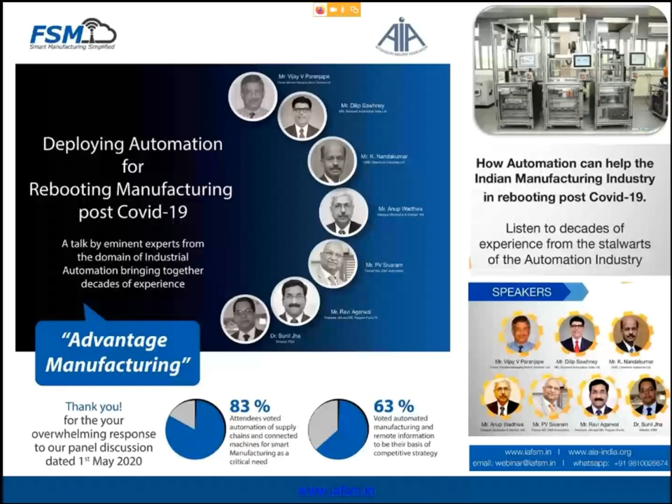I will now move you through the introductions to our panelists. Can we have the profiles of the panelists? Our first panelist is Mr. Dilip Sawhney. Mr. Sawhney has more than 27 years in industrial automation and in the healthcare technology industry. He's served many leading corporates, both in India and in America. He has been a member of the National Council of CII. Since 2008, he's served Rockwell Automation, and he's responsible for leading India's business in automation.

Mr. Sawhney graduated with honors in electrical engineering from IIT Roorkee. Prior to Rockwell, he has worked with Larsen and Toubro, GE Fanuc, and here he is in front of us, going to lead today's discussion. Welcome, Mr. Sawhney. Thank you so much, Anup.

Our next speaker is Mr. Sivaram. Mr. Sivaram graduated in electronics engineering from IIT Madras, and he has devoted his entire career in the field of industrial automation, starting with BARC, where he worked in automation of power transmission and distribution communication. He has an overall very wide experience in DCS, SCADA, microcontroller applications. In 1996, he founded B&R Industrial Automation and was their managing director till 2017.

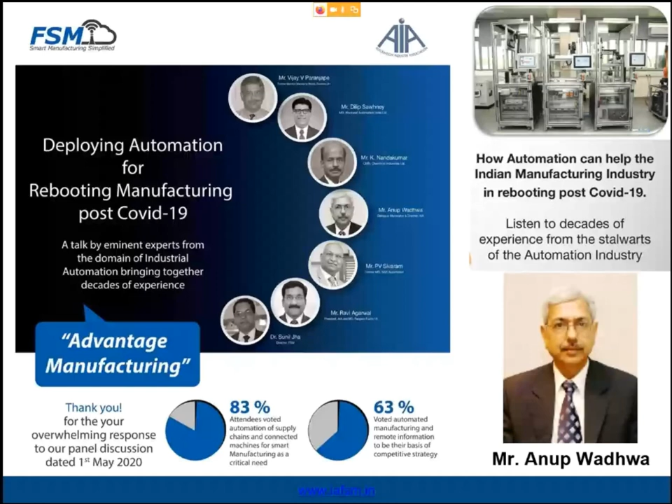So looking at the backdrop of today's context, one of the things clearly people are looking at, and it was even there in the first session, is remote monitoring. I'm going to request Mr. Dilip Sawhney to share with us what are the strategic choices in front of us, and with remote operation, is there a chance for safety to be compromised? Can we address and identify the weak spots, and also what is going to be the situation if decision makers are not actually present at site?

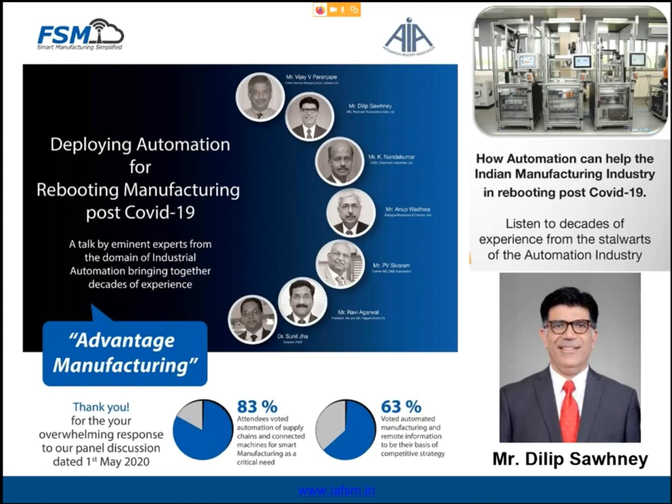Anup, I will address your question. I'm going to be using a couple of charts, so it'll be nice if you can bring them up on the screen as I begin talking. So, as we had deliberated in our last session, technology and automation is going to have to play a front and central role in the way forward from here, right? And yes, you're absolutely right. Remote monitoring is a very, very important consideration, right?

If I may, I would like to start from the context of a typical brownfield facility. Why brownfield? Because we are thinking of starting off with what we have. Greenfield is something which we'll get to eventually as life normalizes, right? So in a typical brownfield facility, the challenges that you would typically expect, especially in the context of a cold startup, right?

You're going to have limited workforce, and like you yourself said, physical distancing norms, and also the fact that many of the migrant workers may have moved back, and these are people who had a lot of tribal knowledge available on how certain operations needed to be carried out. You have lesser hands. B, you'll have those trained people no longer available on site, right?

So essentially, you're looking at a set of challenges, and pay some attention to this graphic which is there in front of you, typical facility. So there are considerations like safety, productivity, skill gaps, ensuring collaboration while people are remote and apart, right? Now, some of these challenges may certainly require some new investments, right? One of the examples could be if you did not have a holistic safety strategy implemented.

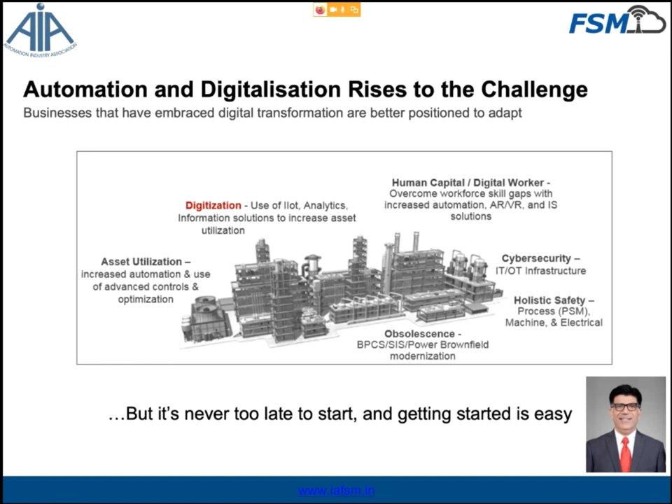And if you can take me to the next chart, please. Right. So what I'm trying to say over here is not everything needs to be a fresh investment. And I'm taking the example of implementing alarms. Most of the plants, most of the facilities, factories, they already have the facility of alarms. But oftentimes what we've seen is that these are either overlooked or they're bypassed or simply not in use, right? Now, nothing can be worse than restarting and then running into an unplanned downtime, which could have been easily avoided if the alarms were not suppressed, right?

So what I'll submit to you all, before I come to the topic of remote monitoring, is a back to the basics approach, leveraging the investments that you already have made, right? Because there's a whole lot that is already there in terms of the capability of the existing systems, right? Please pay attention to those capabilities, which sometimes in good, quote unquote, normal times used to get overlooked. They need not be overlooked now. They are going to be your best friends, shall we put it that way, right? As you go ahead and restart with severe constraints. So take me to the next page if you can, please.

So as we transition, Anup, I'm going to now come to the point that you had asked me to talk about, right? Remote connectivity has become a very important consideration. There's no doubt about it. In our previous webinar, we discussed at length about the role that technology in general has to play. And I think there was, by and large, very strong endorsement from the audience as well, right?

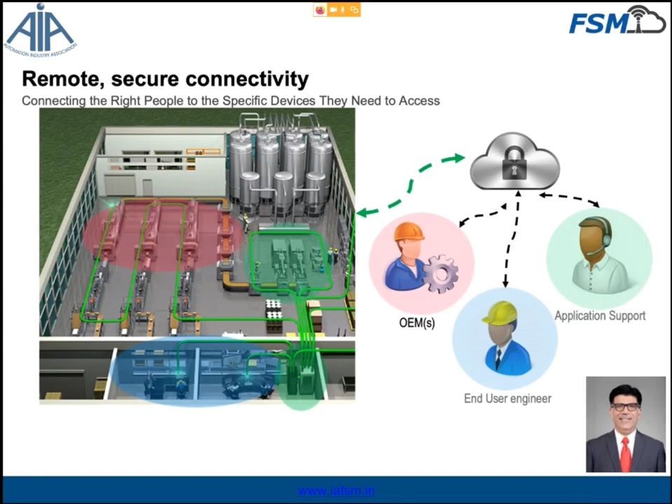If you can move to the last chart, which is also my final one, I wanted to share with you this paradigm. Call it an eventual vision. I'm calling it the connected worker. This concept is basically an extension of the industrial digital transformation that we talk about. It comes to the foreground in times like this. You'll have fewer and fewer domain experts who are going to be on site.

So you'll eventually have remote operation centers that will be created, or pools of remote experts who are physically dispersed. But they will need to be accessed, often in real time, by people who are on site. So mobile and augmented reality technologies are already being used. This is no longer futuristic. This is happening right now.

And if anyone is interested, I'll be happy to share some use cases and also some success stories in this phase of lockdown, where people right here in India have been able to use these technologies. I was on a call with a customer just this morning, and I was delighted to note some examples coming from their side.

What needs to be borne in mind, though, is that when you think of a digitally augmented, multi-skilled worker, why do we say multi-skilled? Because there's a pool of domain experts who are enabling a worker who's in situ with the equipment. This is not a slam dunk technology implementation. It's not. In order to drive sustainable results, you need to do this in tandem with people and processes.

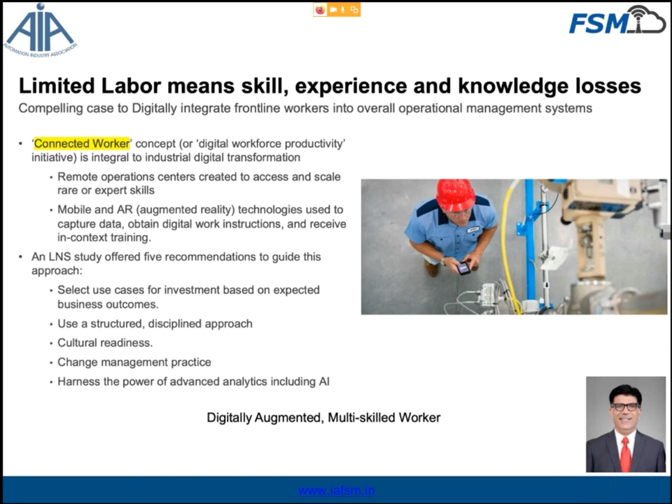We have to commence production in a safe manner, and the challenge will be to keep production going with reduced manpower. Now, we've heard about the concept of connected machines since a long time. Does connected machines address this need during the reboot and in the new normal situation? Mr. Sivaram, what is your take on this?

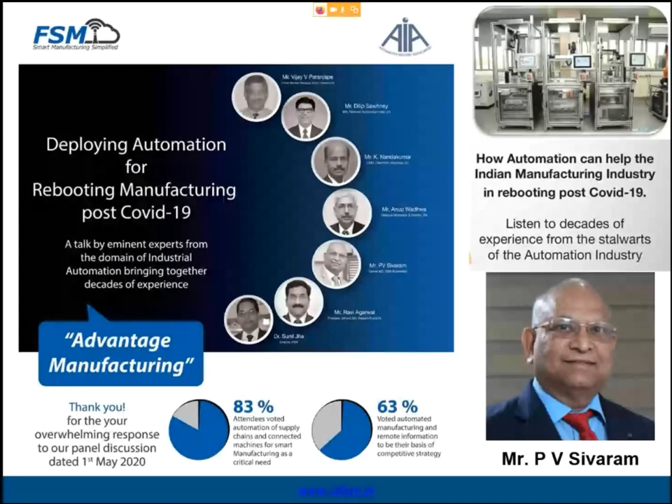So, we've spoken about remote connectivity as a technology piece. We've spoken about connected machines. And now let's move over to the other most important asset in a manufacturing operation, which is the materials. So taking back control of the supply chain, which is inbound, outbound, and in plant, is going to be of very high consequence. I would now invite Mr. Agarwal. Mr. Agarwal, how can intervention through automation help an organization to create advantage in manufacturing?

I would like to invoke maybe a picture along that. Could we have the first part? Thank you. I would say, given our material chain, given the information, it is the efficiency of how we deal with the material. Any kind of intervention through automation and information transparency increases the efficiency of the operation. And that's a very, very desirable aspect in the material chain. And the more information we have of what is happening, incoming, outgoing, and on the shop floor, good transparent information will help us to reduce waste. And it becomes more and more critical.

In fact, mitigation of waste is actually a direct saving. I'm going to talk more about it down the line.

And as the information along the whole chain of the enterprise, we started that in the beginning from my colleagues, information of the enterprise, information about the connection of the machines, the health of the machines, the operations of the machines. And if we couple it with the information of the material in the enterprise, that paves the way for a lot of success and efficiency.

And in hard times, as we are at the moment, all of this, efficiency or waste management or information transparency and exchange, culminates into the most coveted aspect of the enterprise and the individual, that is the cost. So I've tried to indicate how through material chain automation, one can engage in increased efficiency, reduction of waste, increase of information, and reduction of the cost.

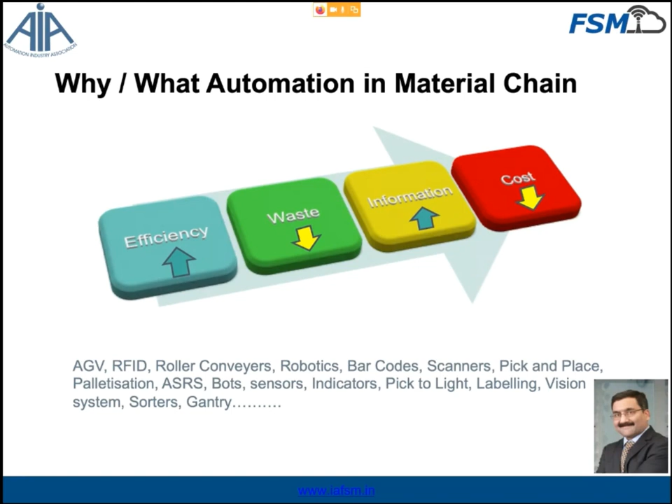Of course, the safest and the simplest bet remains barcodes, with which people identify the material through the different stages. And all of this, if implemented in the most ergonomic and viable way into an operation, increases the distances between the operators and decreases the surface handling of the manufactured or packaged material, and so on. I can go on and on, but there are quite a few solutions currently in the bouquet of automation which actually help in outbound and in-plant material handling. Quite a few: labeling, vision, and so on.

But what am I actually saying? If I can distill it down to certain turnarounds, most of the time in enterprises, we are struggling with reprioritization, identification, what came from where, something lying around. So I would say preferential vendor items, reducing human error, because once the material is typified through whatever solutions, distance reading, optical reading, they are reducing human intervention and therefore the human error as such.

The vendor management, the timing, the incorrect billing. See, increased amounts of data and goods waiting to be processed are also accumulating due to human error, incorrect allocation. So with partial and semi-automation, not big ticket automation, these very key areas can be addressed, especially in volatile times like this, where the probability of error actually rises multifold.

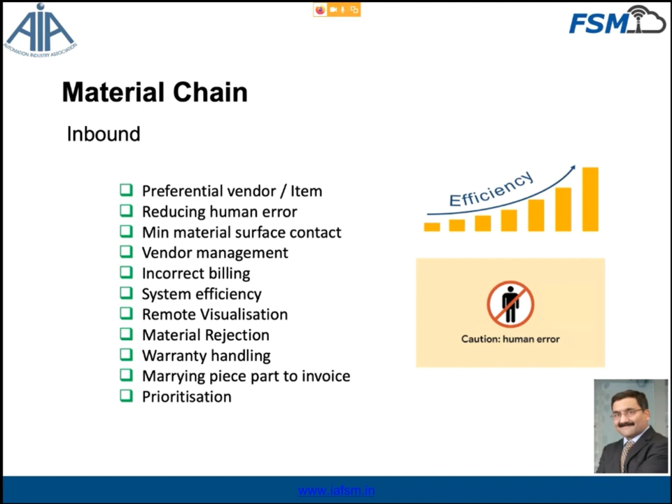Could I have the next visual, please? Thank you. So as the material has come into the factory, one of the bigger banes is, what is my inventory? Can I have first in, first out? Because most people talk about it in actual manufacturing. You and I know how first in, first out is so very difficult to implement in a manual fashion.

One of the key aspects in this material chain, if the material so produced is identified and it's in a connected enterprise, remote visualization included, is the genealogy. So if the piece part being produced can be characterized and its information stored, that goes a long way within the plant: reskilling, improvement or removal of defects, and also goods assurance to the outbound. Similarly, work in process management and prioritization.

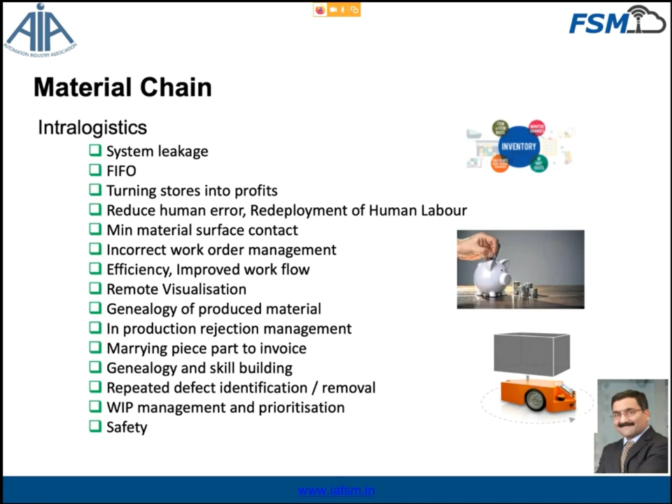The system leakage. The bane in manufacturing has been, well, what is the wastage and the system leakage, whatever the reasons might be, moral, immoral, or whatever. But information-driven manufacturing or an information-driven material chain actually helps us arrest system leakage. And arresting system leakage adds directly to reduction of cost. And there are many proven cases, lighthouse projects, where all this has been done. Warranty handling or inventory management.

Another part in the outbound supply chain or material chain is dealer stock visibility in an enterprise. A lot of time and resources are always spent in haggling as to what is needed, what is the stock, what is the work in progress. So visualization of information with partial or full automation helps us in a very quick recovery in the post-COVID scenario. It may not be big ticket; the prescription remains within our own processes: whichever are the pain areas, we start with them and then integrate horizontally and vertically.

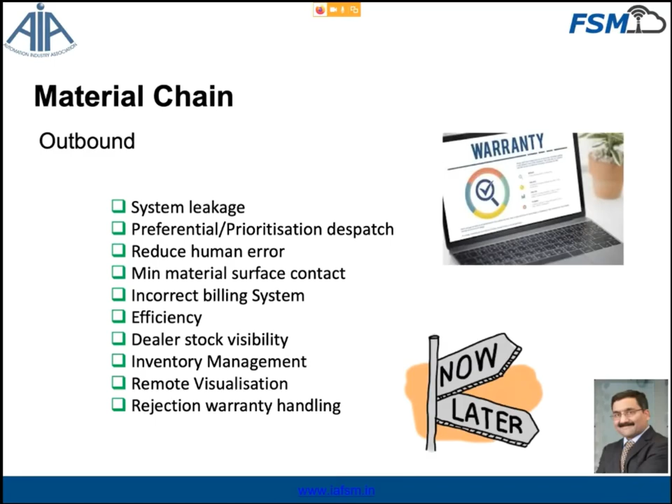Thank you, Mr. Agarwal. I think you've clearly laid out the roadmap for foolproofing in areas of identification, tracking, tracing, etc. I think there is a need to now look at another aspect of business, which is, traditionally manufacturers and manufacturing oriented companies have always been comfortable with a steady flow mentality, which means once a line is on, it'll keep on producing the same stuff and try and get economies of scale.

Now, many believe that in the new normal, the business will be challenged on this mentality. There would be frequent adjustment in the production plans. The machine setups may need to be changed, and at the same time, without having any drop in quality.

So I would like to now call upon Mr. Paranjape. Mr. Paranjape, in the light of all this challenge happening, how should manufacturers cope with this? And is there any role for automation?

From the mall, the orders are going into SAP as a sales order. SAP is doing the MRP run. This is connected to the product lifecycle management system deployed there, which is then triggering the whole manufacturing process. And I have seen with my own eyes a product which is normally manufactured in millions per year, a batch size of 10 with 3 variants moving on the line. So it's not something theoretical. This has been achieved. But if this is going to be the requirement from the market, then we need to have an integrated approach to our manufacturing automation. Next slide, if I can have.

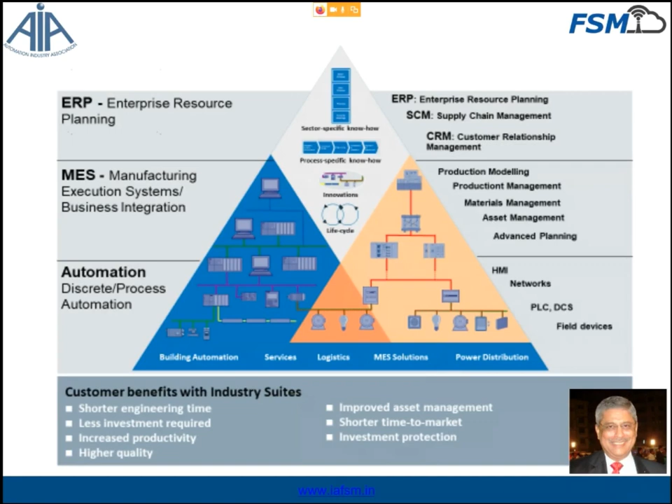This tells more in, what should I say, boxes. What we need to have. We need to have the field level, the control level, the operational level, the management level, with both management of the business and management of the product processes and resources. It is only when you have this kind of an integrated approach that you will be in a position to meet this requirement if this has been identified as the pressure point from the market, if this is being considered as the new normal for the manufacturing industry.

Similar examples also exist in pharma, where again the batch sizes are becoming smaller. But the more concrete example which comes to my mind is automotive, because it has been there for a long time. The other point is, how do we be in a position to do quick startups? If I have heard it correctly, it was in the first presentation that we may have, I hope not, similar instances even in the future. If that be the case, then we need to have the possibility of simulation and a digital twin.

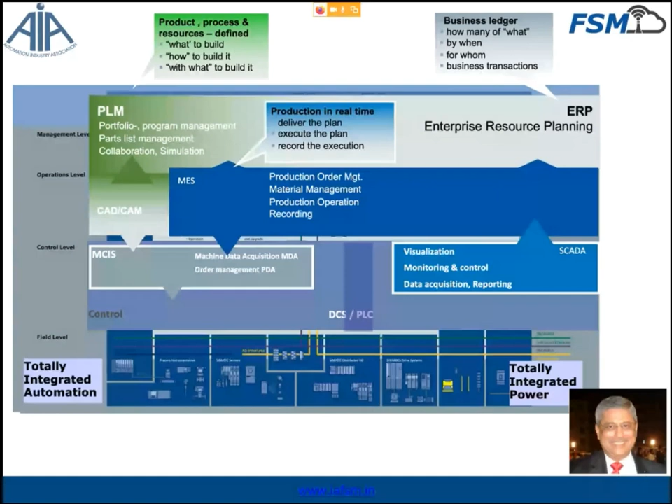Well, this is what the industry is working towards, where you see the autonomic components, the self-configuration as far as commissioning is concerned, self-optimization, and the holistic modeling. All that for consumer satisfaction. Now, this is not the forum to go into the details, but this is what is going to be available if consumers are the ones driving us to this new normal of, let me say, a single piece flow. Then this is what is going to be the requirement for the near future.

With that, I conclude my presentation. And in any case, during the question answer session, if there are any questions on this, I will be very happy to answer them. Over to you, Anup.

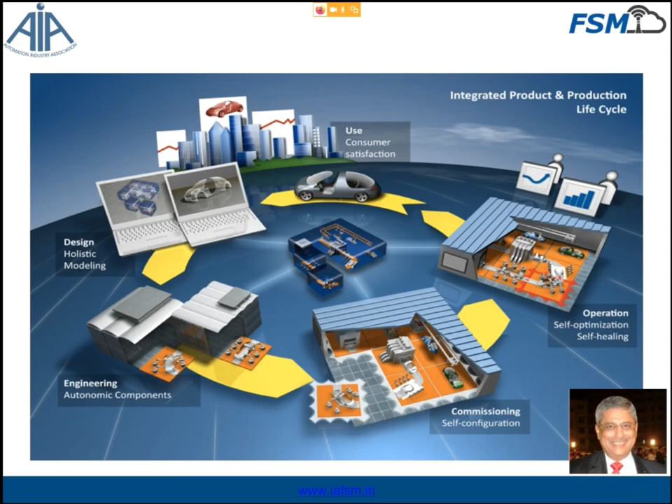Thank you, Mr. Paranjape, for the wonderful insights and also the cautionary advice you have given. We are therefore observing a rapid convergence of controls, communication, and collaborative technologies that augurs well for smart manufacturing. May I now request you, Professor Jha, to share your insights on what is really unfolding on the ground in India in the area of smart manufacturing, and how that is going to be relevant for our small and medium enterprises. Over to you, Dr. Jha.

Yeah, thank you, Anupji. It's really a good insight given by the other panelists on the subject. I will share my thought process on understanding smart manufacturing, and I will focus a little bit more on the small building blocks which will allow us to experiment. We keep on hearing about these smart manufacturing technologies for a long time, and this is the hour where we should experiment with whatever limited resources we have.

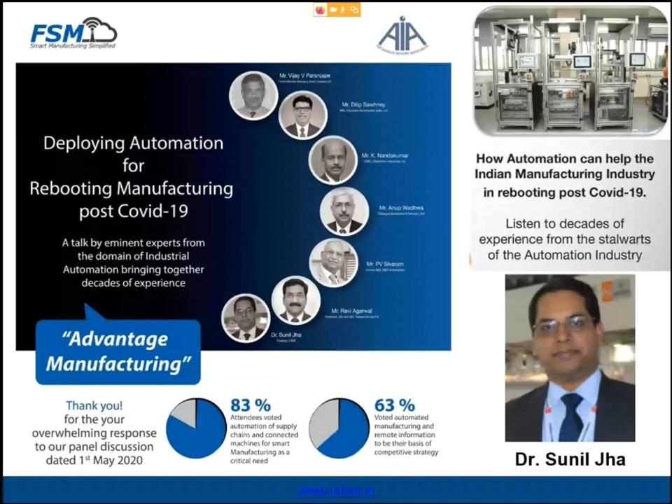So I'll just quickly touch upon what exactly we are talking about when we talk about smart manufacturing, and how it is going to be different from what we are doing traditionally. I'm throwing some light on the key aspects of smart manufacturing. Last time also I was emphasizing the connectivity part, and everybody on the floor who is listening, and the panelists, are agreeing to that.

Certainly this is the foremost step to enable these smart manufacturing concepts. So when we are talking about smart manufacturing, connectivity is the first thing required. And when we are talking about connectivity, certainly there are big pictures to connect all the assets, getting all the data from these devices. I'm just talking about the minimal thing that you can start with.

So when we talk about connectivity, whatever best sensors or the most critical data that we can bring into the system, this real-time data coming to you will help in building collaboration with your suppliers and customers. So these technologies, though laid down earlier, are quite relevant in the time of need, which we all understand today. This will also help us establish good collaboration between the different departments in the organization as well.

Then we will be talking about the optimization of resources, because at this moment we are running short of many resources, whether it's money, manpower, material, a lot of things. So we should be very cautious about spending those things. When we talk about optimized operations and functionalities, we will be looking for reliable and predictable production capacity. How we can increase asset uptime is very important, because now we have constraints and we would like to utilize the resources properly.

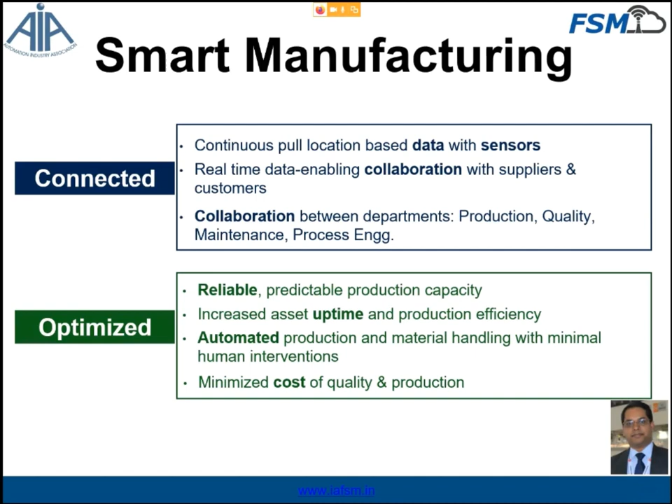We will also be talking about automated material handling. I think we are all familiar with how AGVs and cobots helped our healthcare people a lot to do those tasks in these difficult moments. I'm not saying that you should also go for that, but we need to think through some of the mechanisms. May not be a full-fledged cobot or AGV, but even low-cost options can be tried out to do material handling with minimal human intervention, because that is the need to run the factory in the current situation. And certainly minimized cost of quality and production.

I will just touch upon the other three key aspects of smart manufacturing, because this is something we are trying to build upon. When we talk about transparency, this is another layer which is very important to build confidence with the customer. It will also help you in estimating the right forecast for demand, so that you can run the facility for that desired need only. And moreover, with the live data available from establishing connectivity, you will be able to do better decision making.

The most important aspect is that to avoid wastage, we should always be proactive. We have to follow the proactive approach, which is very much embedded into the smart manufacturing concept. So when we talk about predicting anomalies, we need to identify them before situations go out of hand. Same in terms of stocks also. I'm not saying that you will implement everything right now, but I want to emphasize that these are the key aspects of smart manufacturing, and you can start from anywhere in the minimal capacity you can. These things will give you an advantage not only today, but in the long run as well.

So even if you can identify supplier quality issues earlier, certainly, as we were discussing, real-time safety monitoring is a very important aspect, because when we have limited people around, how the systems are being operated are the critical things to understand. Now, the last one can certainly be thought through in the long run, but it is very important, the way you have seen factories transformed to produce goods which are in the highest requirement.

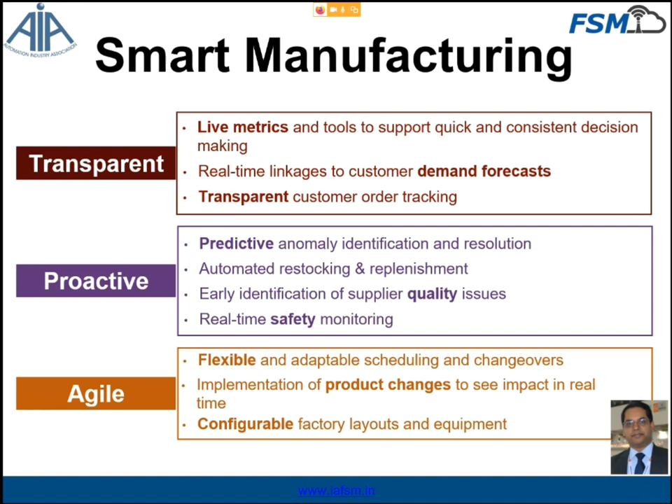Now in the coming slides, I will be just sharing some of the quick steps and the implementation that can be easily feasible without much investment. So this is the one which I would like to share again, though it has been shown by Mr. Paranjape also. When we are talking about the connectivity, this is how we should build up the layers. So today I'm not emphasizing that we should build the whole 3-layer structure right now, but certainly we can start with the connectivity at the field level.

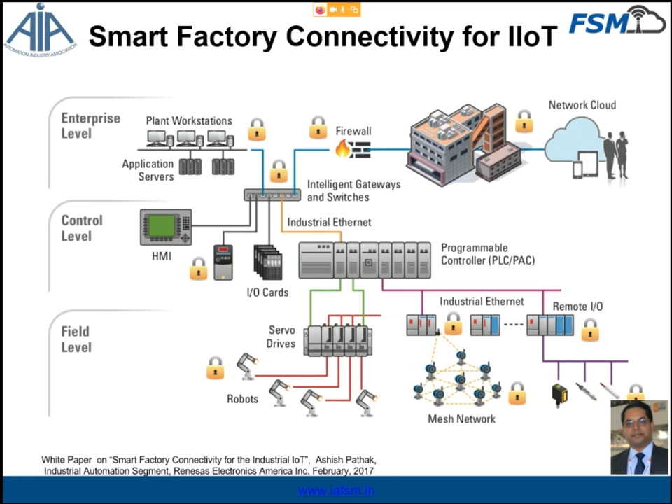So I have a quick example to discuss with you. I just put the case of how we can establish a data exchange with the machines and IoT. So I have just taken two examples. One is the automated machine that you may have, so maybe your CNC machines could be a part of that. And the other aspect is the legacy machines that you have.

So to start with, whenever we are thinking of building in a field level connectivity, and when we want to at least get the minimal information which will give me an insight about the operations, one where we already have PLCs, sensors in place, the actuators and the network is in place, the only thing we need to work towards is building the connectivity.

So we need to look for hardware like the IoT gateways, or maybe some kind of a data aggregator running on some server. So those kind of things can be expanded. So you may not end up doing much investment. The only thing you have to do is establish a minimal connectivity with the system.

On the other side, if you have legacy machines, what I just want to emphasize here is we need not convert this legacy machine into an automated machine, but certainly we will be interested in certain minimal information from these legacy machines as well to understand the operations. So for example, this is one machine where I can say that I should capture the speed, feed and depth of the machine if it is possible.

And then we need to identify the right sensor which will enable me to do that. The same thing, we would be capturing some of the vibration signals to take care of the hazard part as well as the machine health part. Energy monitoring is another aspect possible through this. We can also have a very minimal number of IOs which will be helping us in getting the right information.

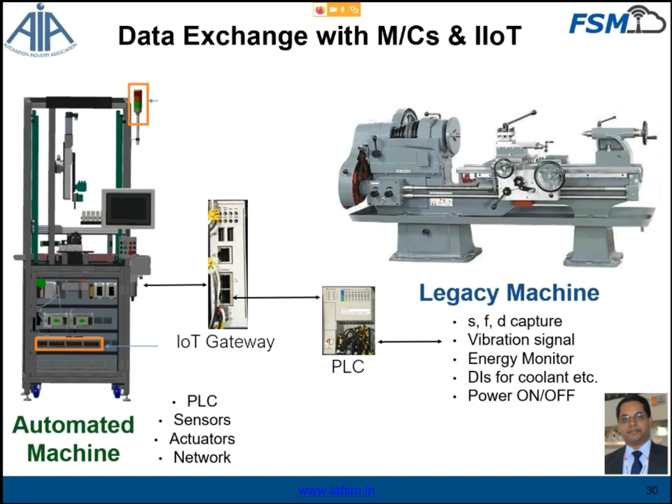The idea is that in those situations where the machines are like this, we will certainly look for some minimal hardware which will give us the flexibility to interface these sensors. At the same time, it should also give me a provision to connect with the network. So even a low-cost PLC could be one option where you can have IOs available, and on the other side it can give you an Ethernet connectivity which you can plug into the IoT gateway to pull that data. So this is the way we can at least start with establishing a data exchange with the machines.

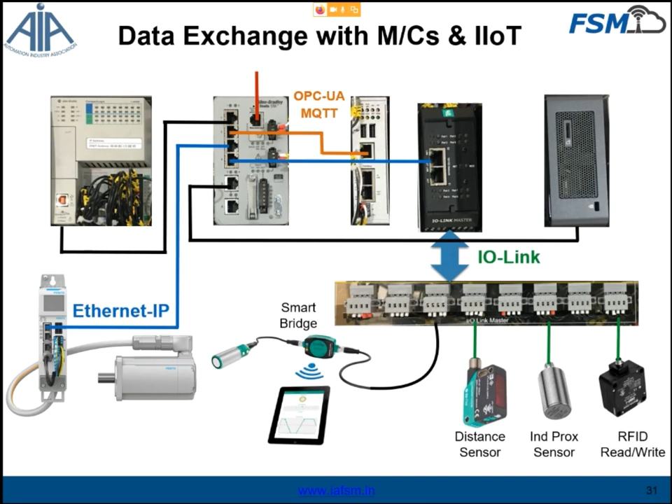The next thing that I would like to mention is something we should certainly be aware of. Those who are in the field of automation will understand that the task the way I have explained it in the previous slide is not so simple. So the idea is to understand the different protocols in the machines, the systems already deployed in your facility, and how you can build the bridge between the different hardware to get the data from them, and how that data can be made to flow to the IoT gateway.

So after that, there are two aspects. Once we have the data, one option is that you can directly build some of the services and solutions onto the data that you are getting. Most of the time people just build up a small quick dashboard to get the information visually available to them. But in the long run, you can always think of a platform where you will be at least modeling the behavior of the whole system.

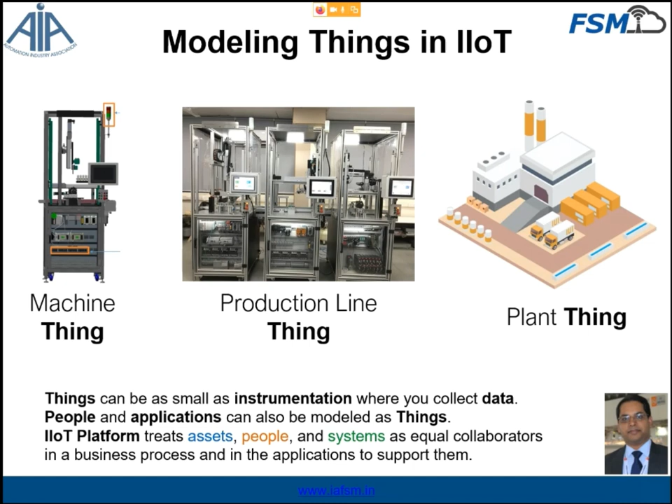So whenever we talk about the industrial IoT, we always look forward. It's not just data that you will be getting and then trying to visualize immediately. We can think of modeling the whole stuff. So you can even model a machine, you can model the whole production line, you can model the whole plant, so that we are able to correlate the events, the data that are flowing through the system. So as an IoT platform, we should always try to model even the people, and applications can also be modeled into the platform. So that's the bigger picture of the IoT that should be built up on the basic things.

The most important thing that we require today is the gateway. So when we talk about the connectivity, this is something which is required to build up, and it's not just for one machine. If you have a bunch of machines, this gateway can help you in connecting most of them. So the idea is to extract the data from different controllers or different PLCs which have a different protocol of communication, and finally make that available to the system further in the IoT platform. Or you can establish a cloud connectivity through MQTT.

So this could be either a physical hardware platform, or a kind of data aggregator can also be used to do this. So even if you have a minimal implementation, you can plan for that. Just deploy a small data aggregator into one of the systems in the plant or the facility, and you can pull out the data and make the connectivity possible.

Next I will be discussing the workflow that is to be implemented for the data. Once you have the data, once you capture it, how to organize and visualize and then analyze, because certainly just getting the data is not enough. So what I have just explained is, from a very basic level of establishing connectivity, how you can leverage the benefits out of that basic connectivity.

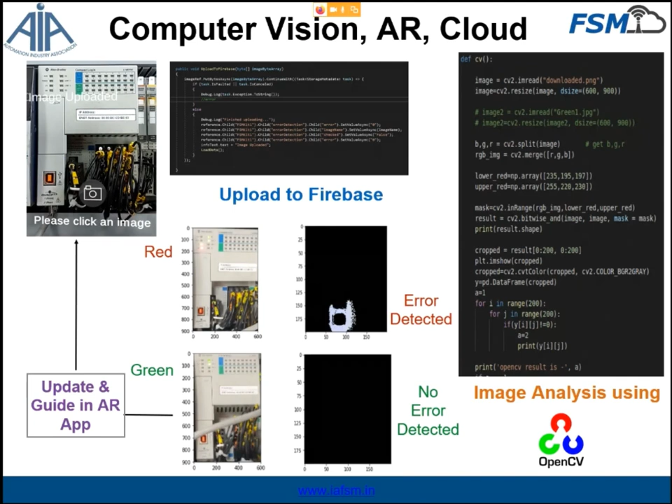Here I am just giving an example of open computer vision, OpenCV, where that system will analyze the image that is being uploaded, and from that it can detect what type of fault it is, and through AR, in the same application from where you captured the image, it will give you further guidance. So it's not just an image, it's real-time information captured, analyzed in the cloud, and then sent back to the person in AR. So that's a simple closed-loop communication that can be built.

This kind of implementation can be thought through for certain quality parameter monitoring, through vision and through sensors. And finally, the data and decision making can happen in the cloud and then be communicated back to the PLC. You can also use an augmented view to give information to the user. I think these are some of the technology pieces I have discussed. We are enabling people to understand and learn these new technologies and experiment with them. This is the right time to at least deploy some of these options.

Thank you very much. Anup, over to you. Thank you, Dr. Jha. I think you really brought the interest alive in the audience, and I'm sure most of us who are now waiting for our turn to go back to plants can do a lot of self-learning.